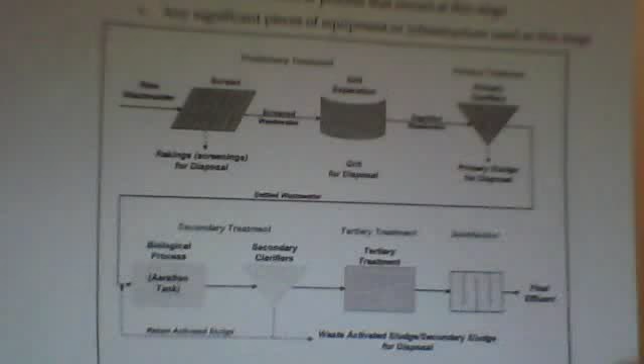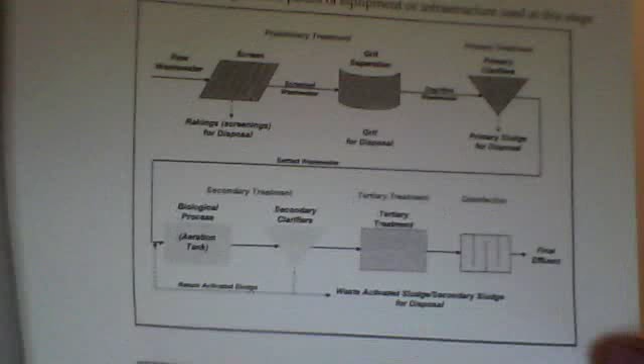Okay, the first stage, preliminary treatment. Preliminary treatment is necessary to ensure that large objects or grit do not damage piping or equipment in the treatment facility. Sewage entering a wastewater treatment plant initially passes through a series of devices designed to remove or reduce in size large solids, grease, scum, and grit.

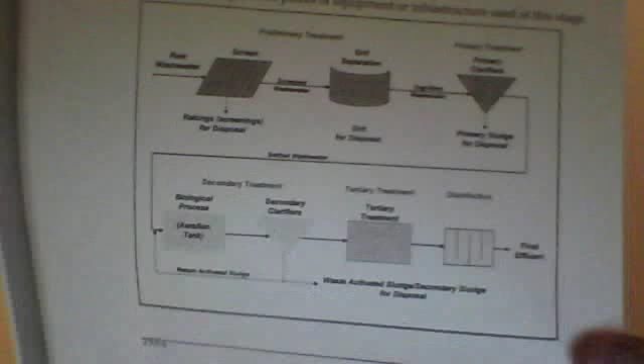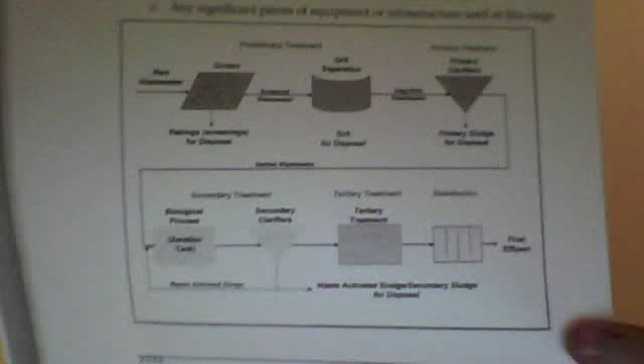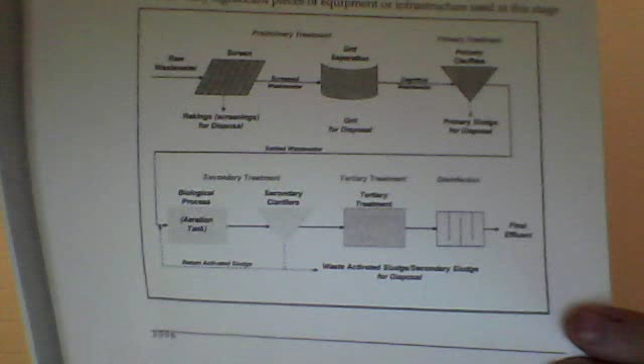Coarse screens, also known as bar screens, are used to remove large objects from the wastewater. Larger particles may also be removed from the wastewater by chopping or shredding in a process commonly known as comminution. After the screens and shredders, grit such as sand, eggshells, stones, and gravel is removed in grit channels or chambers.

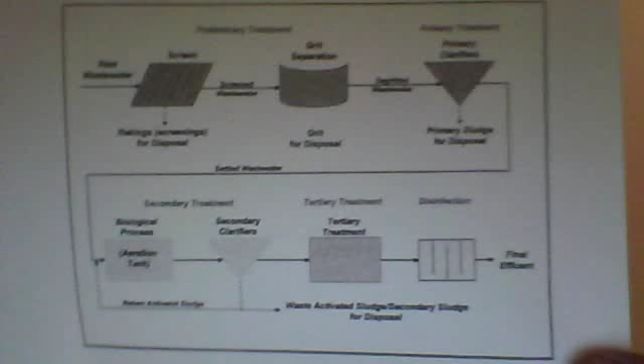Primary treatment. The purpose of primary treatment is to remove large settleable and floatable materials. In this process, sewage flows to primary settling basins, often called a primary clarifier, where flow velocity is slowed so that solids settle or float to the surface.

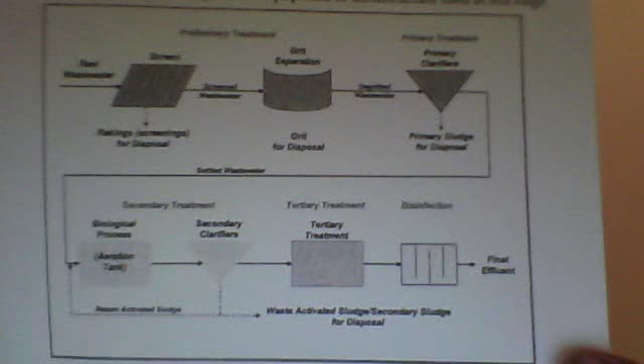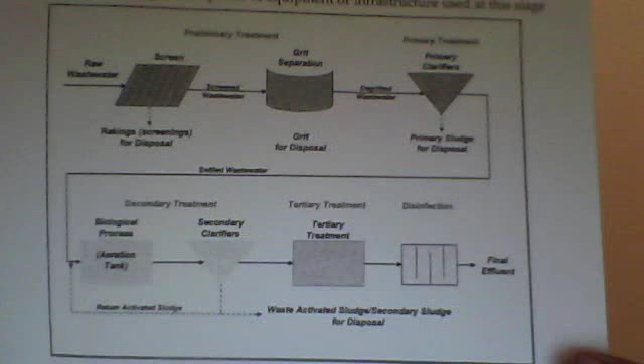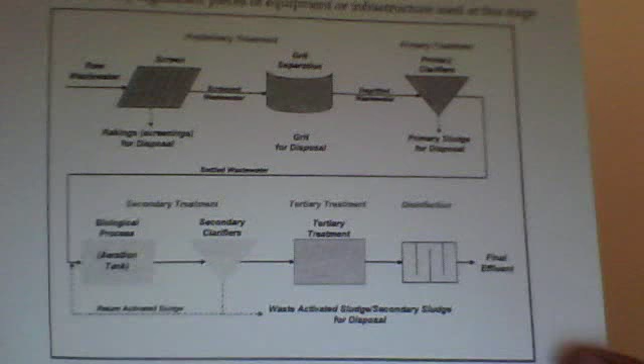Secondary treatment. Secondary treatment is used to remove dissolved or unsettled impurities such as BOD and suspended solids. Secondary treatment processes used in Ontario include the activated sludge process, sequencing batch reactor (SBR), trickling filters, rotating biological contactors (RBC), moving bed biofilm reactor (MBBR), and aerated lagoons. Like the activated sludge process, these methods depend upon the action of aerobic bacteria to break down the solids and BOD, and as such, secondary treatment includes both physical and biological processes.

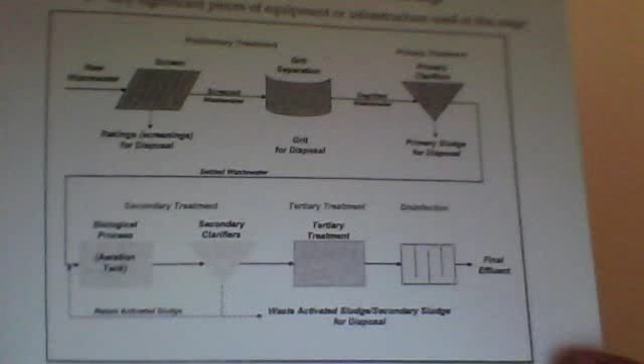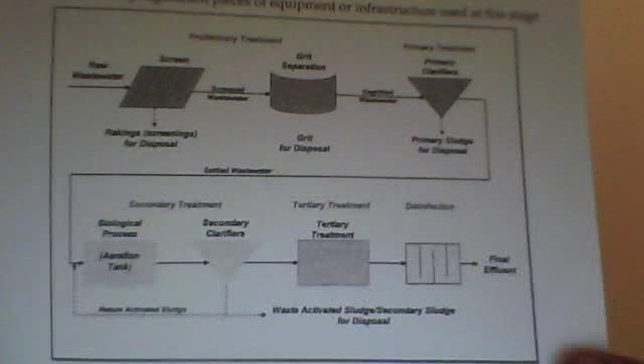Tertiary treatment. Some wastewater treatment plants also have tertiary processes to further treat the wastewater following secondary treatment. There are many different types of tertiary processes, but most involve physical chemical processes. They include chemical precipitation, reverse osmosis, carbon adsorption, filtration, and membrane filtration.

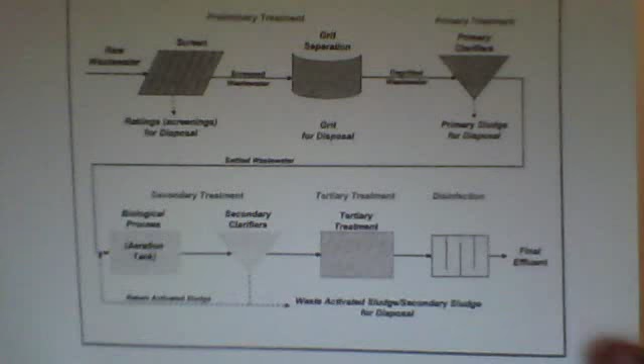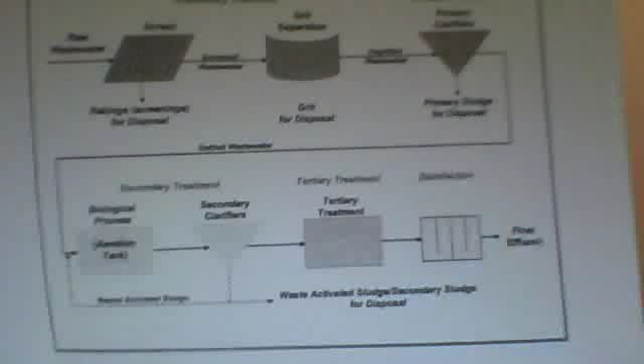Okay, so that's for the diagram there: preliminary treatment, primary treatment, secondary treatment, and tertiary treatment.

Describe at least 2 key variables that are being manipulated in wastewater treatment processes. Answer: oxygen and bacteria. Describe the objective of sludge treatment before final disposal and list 2 main methods. Answer: the prime objective of sludge treatment is to stabilize the sludge so that there is a low oxygen demand. The most common methods used for sludge treatment are aerobic and anaerobic digestion.

Describe the main ways that aerobic digestion of sludge differs from anaerobic digestion. Answer: in an anaerobic digester, anaerobic bacteria, those which do not require dissolved oxygen, break down the solids in the sludge to methane gas, carbon dioxide, and inert solids.

In aerobic digesters, microorganisms also break down the sludge. Eventually, as food runs out, the microorganisms will use their own stored body mass for energy, resulting in a stable final product.

List at least 3 secondary treatment processes and cite one that is most common in Ontario. Answer: activated sludge is the most common secondary treatment process used in Ontario. Other methods used include sequencing batch reactor, trickling filters, rotating biological contactors, moving bed biofilm reactor, and aerated lagoons.